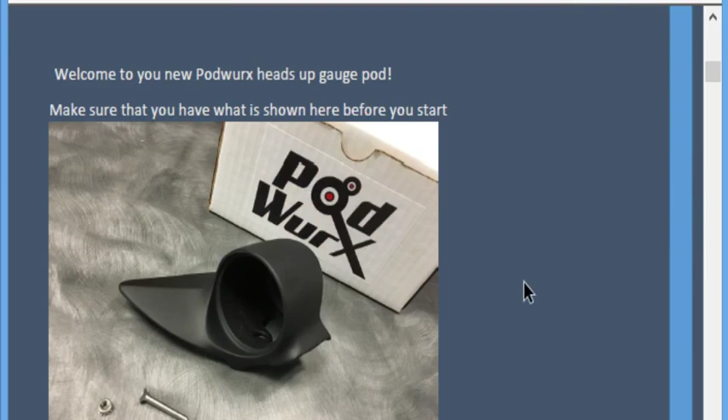But we're going to take a minute and go through the actual installation process, kind of a tutorial if you will. First thing you want to do is pull everything out of the box. Make sure that you have all your parts.

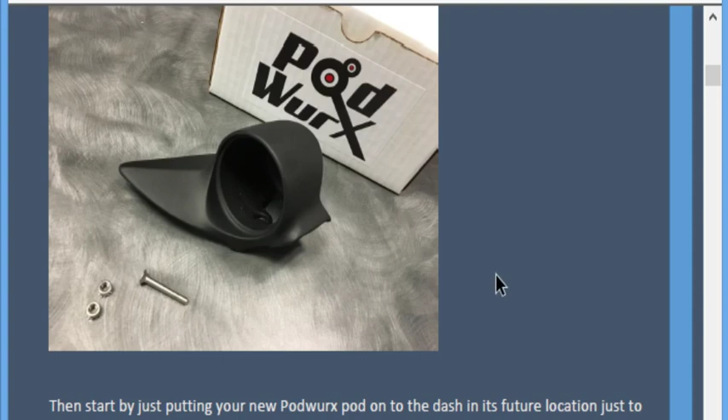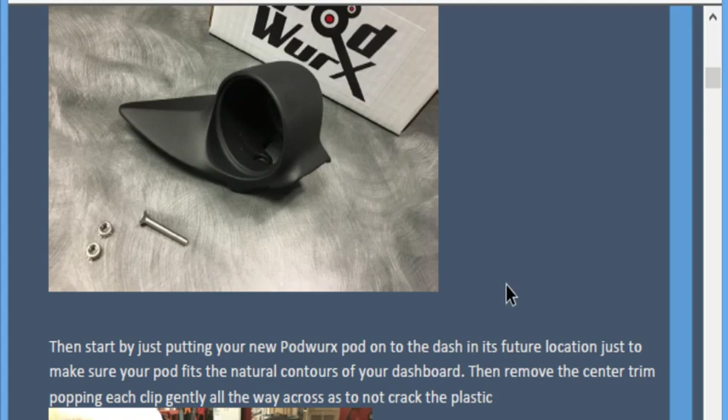The pod itself, there's some hardware, a couple of nuts, there's the screw. There's also now included in the kit an O-ring, and that O-ring is for gauges that are slightly smaller than 52 millimeter. We have found that manufacturers are varying a bit in that 52 millimeter pod sector, so the O-ring will help hold those smaller pods in.

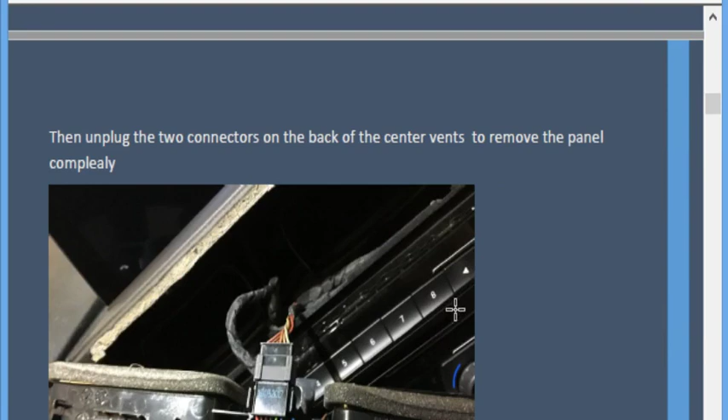All right, let's get started here. We're going to go ahead and pull apart the front vents, being very careful. This trim piece goes all the way underneath to the very side of the dashboard, and this piece here is pretty small. It's got some clips in it. Be careful that you don't break them. Pull evenly, then you're going to unplug the two connectors on the back of that vent.

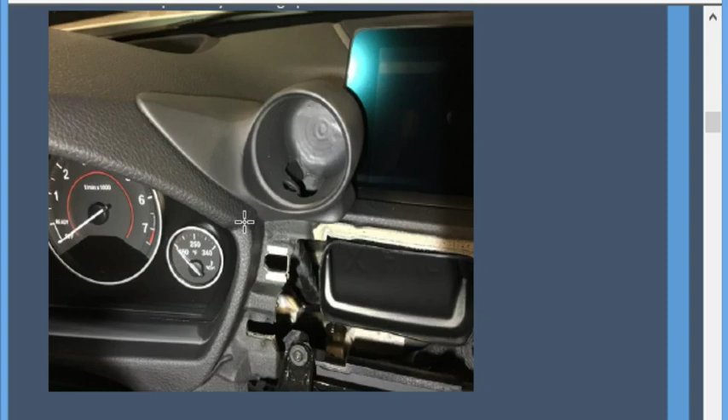Then pull the pod out of the box and set it on the dash. Make sure that it fits perfectly. We've designed this so that it is molded directly to the contours of the dashboard. So we want to make sure that you've got a good fitting pod before you go through all the work of drilling the holes and running all your wiring.

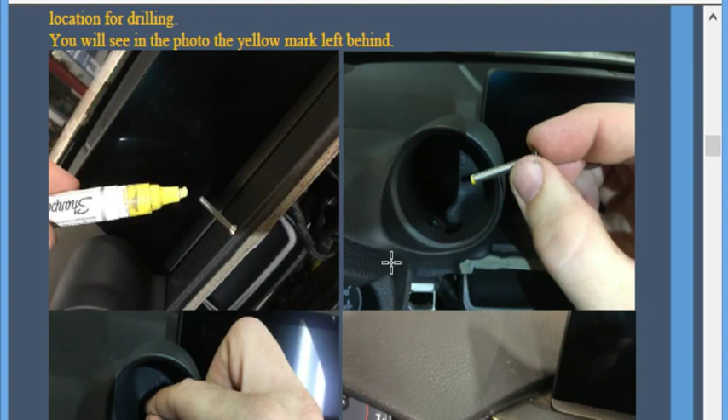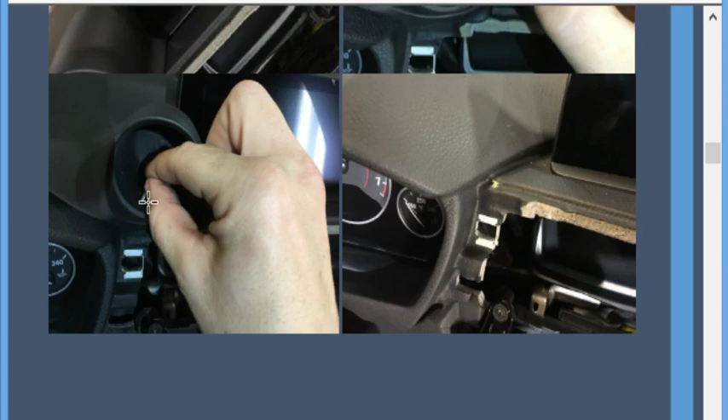Alright, so you have to locate a hole in which to drill the stud. We found that the best way to do this is to use a paint pen, put a little dab of brightly colored paint on the end of the provided stud, and then slide it down through the hole. When you put it down through the hole, it'll leave a mark on the dash that's going to be the exact place where you want to drill. This makes it easy - there's no measuring, no guesswork in where that hole needs to be.

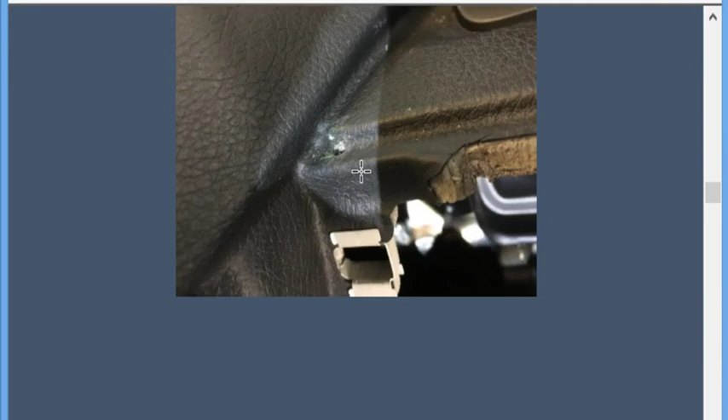Go ahead and drill the hole, and you'll see here the hole is very small, and that stud is very small as well. We've done that by design. We wanted to make sure that we didn't make the dash look damaged after we take a pod off. In other words, we want zero impact after the fact. So if you decide you want to take the pod off the dashboard at any point, sell the car, or trade the car in, it doesn't leave any marks.

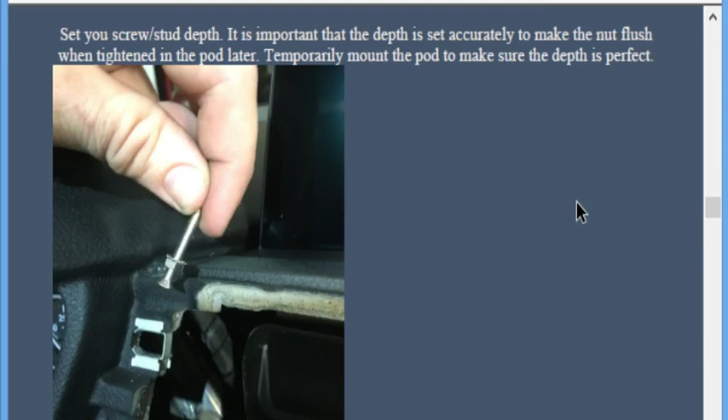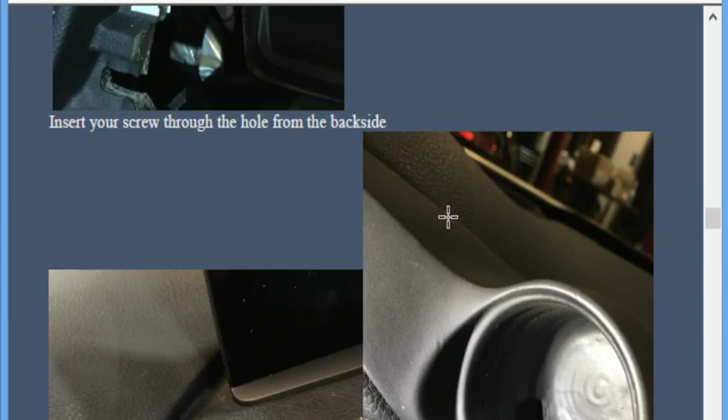That happens right here, so that's covered up by that trim panel, so you'll never see that hole again if you decide to go back to stock. Now what you want to do is put the stud up through that hole, and you'll see here that our goal is to keep the end of that stud perfectly flush with the opening. And then you can see there's a countersunk hole, and that's for the nut.

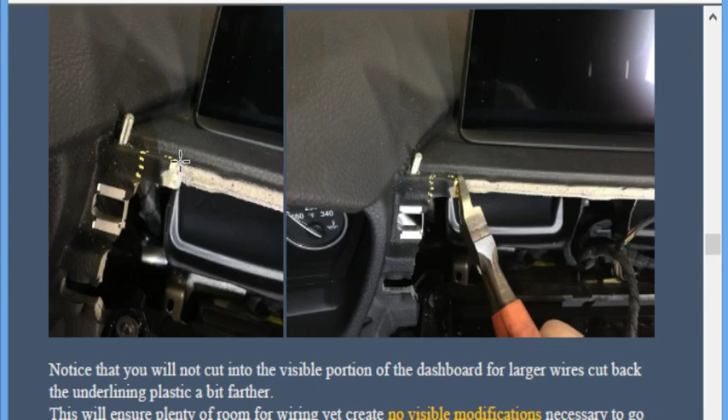We want to go ahead and trim out a little bit of this padding, and there's some plastic behind it, plus reinforcement that you can pull out. This is going to be based more on your gauge than on the pod install.

If you've got a gauge with a lot of wiring, you're going to want to trim out a little more, making sure you don't trim past this line. Anything beyond this little ridge will be visible if you ever take the pod off, so leave this section alone, and only cut inside of the yellow dotted lines we've shown you.

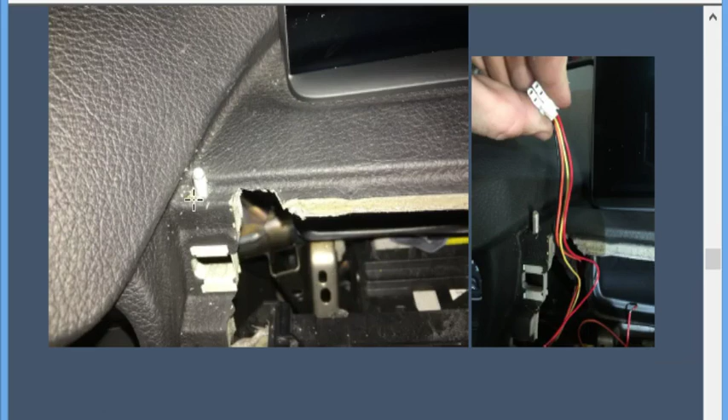You can see here we've already trimmed this out, with our studs all the way through, up at a kind of an angle, which is perfect for the pod and pulling it tight to the contours of the dash. This is a relatively small wire system for the gauge we've used as an example, and that's pretty common for a stepper motor gauge.

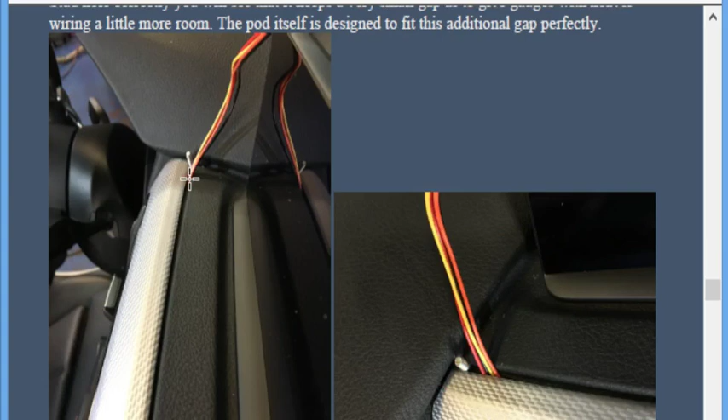So we've taken some of this out, and you'll see that it now comes up between the crack and the stud as well. The pod is made so that on the bottom it's molded with a small ridge that helps keep this trim piece in the dashboard separated, so there's no pinching of the wire.

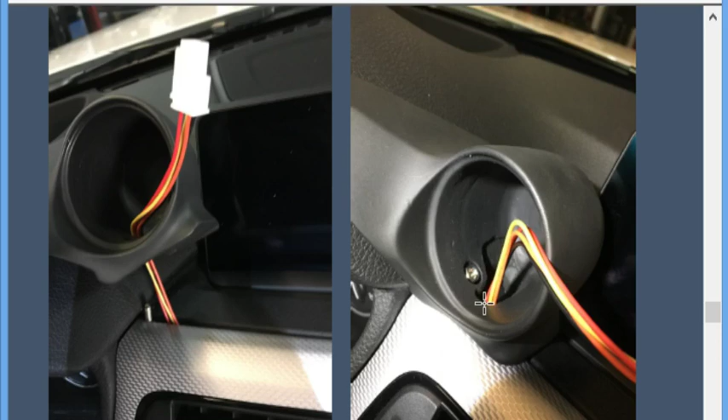Obviously if you have a gauge such as the snow controller, you're going to have a bit more gap and a few more wires, so you'll need a little more clearance. But otherwise you can see that runs up through. We've given quite a bit of clearance in the hole, made it kind of elongated, so it fits a variety of different wires and locations for different gauges on the market.

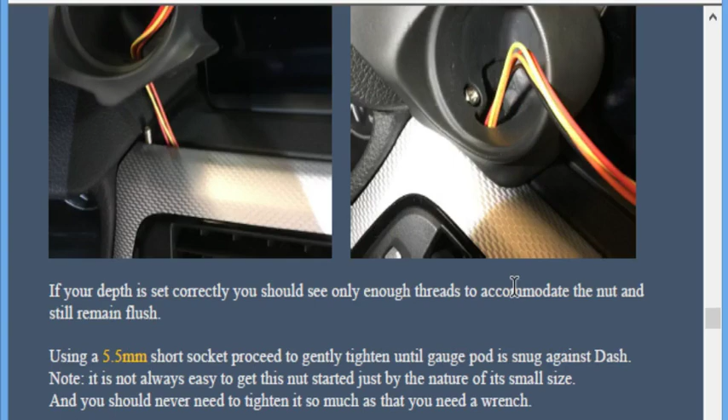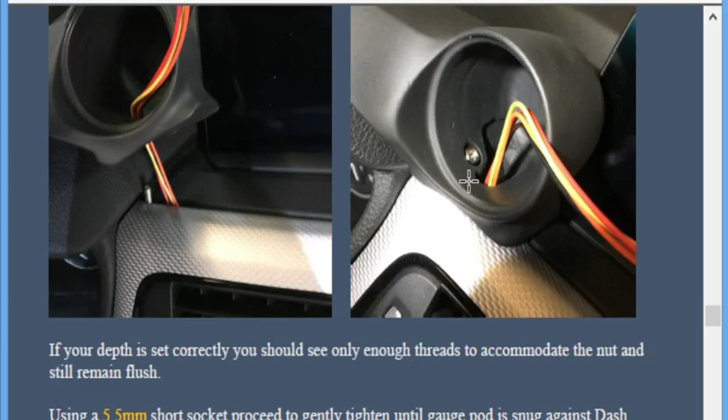After the wires are run up through the gauge, you're going to want to start that 5.5 millimeter nut on the stud. You can see here it's just started, and we're going to tighten that down, usually just using a socket.

You're going to have to use a quality socket. If you use a cheap one, you might find the walls are too thick and you may not be able to get it tight, but usually finger tight is more than enough. If you need to get a wrench or ratchet in there, you can, but don't over tighten -- you could crack the gauge, the pod, or the dashboard.

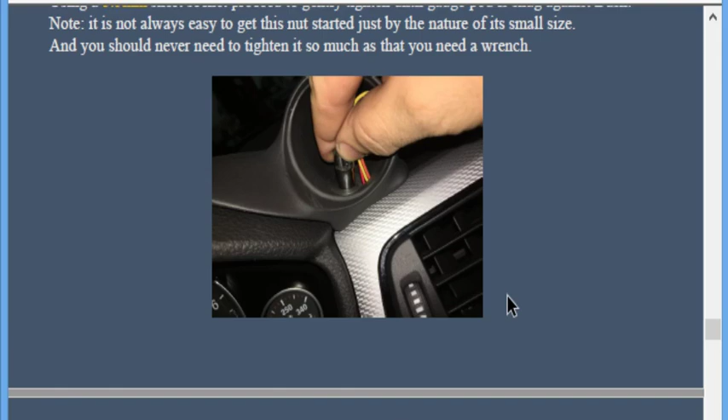We've also added a supplement here. We use the snow controller as an example -- it's a fantastic gauge, but it's slightly undersized, not quite 52 millimeters. So we've provided an O-ring in the kit, which should be blue, and that allows you to slide the gauge in with the perfect amount of snugness.

Other gauges that might be a little small can use that same O-ring. We've found that a few gauges on the market are a little large, over 52 millimeters -- if so, you may have to trim out the inside of the pod a little to make them fit properly, or put a little force into getting that in.

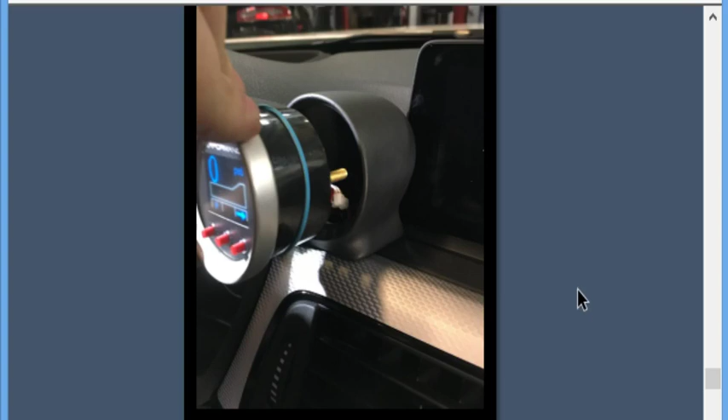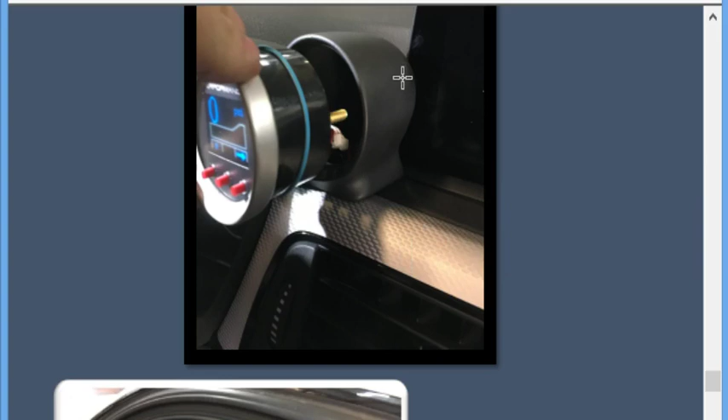Also the length -- there are some less expensive gauges that are a bit long, and some may just be too long for the pod. You may have to trim back some of the studs, or trim out the inside of the pod and sand it out to make room for those oversized gauges. See here, it's all finished, installed, and we're good to go. You can see it looks like an OEM piece, and that was really our goal.